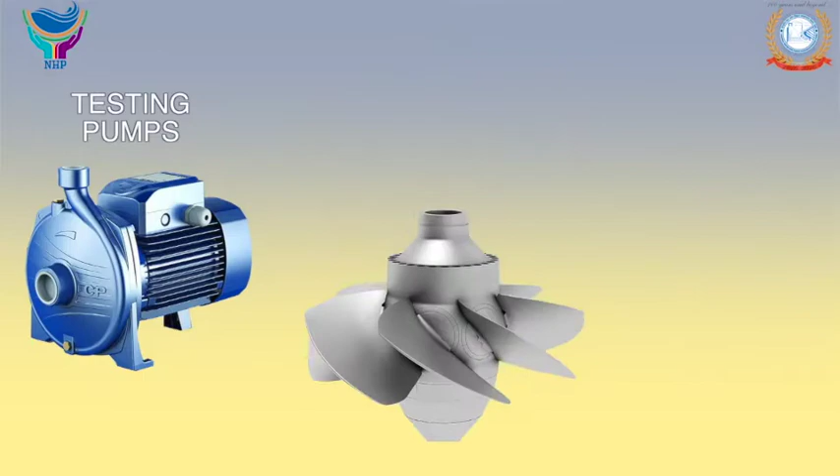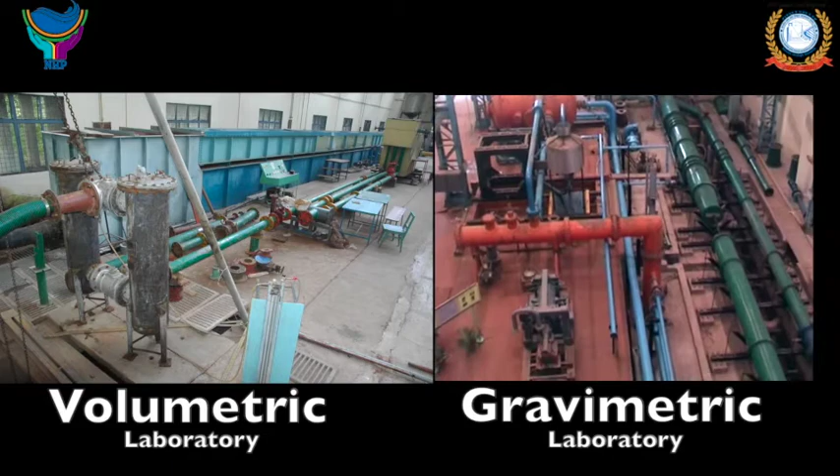The Hydraulic Machinery and Cavitation Division of CWPRS, established under UNDP during 1984, caters to the services of testing pumps, turbines, and calibration of flow meters. The gravimetric and volumetric laboratories undertake calibration of flow meters and testing of filters and other flow elements.

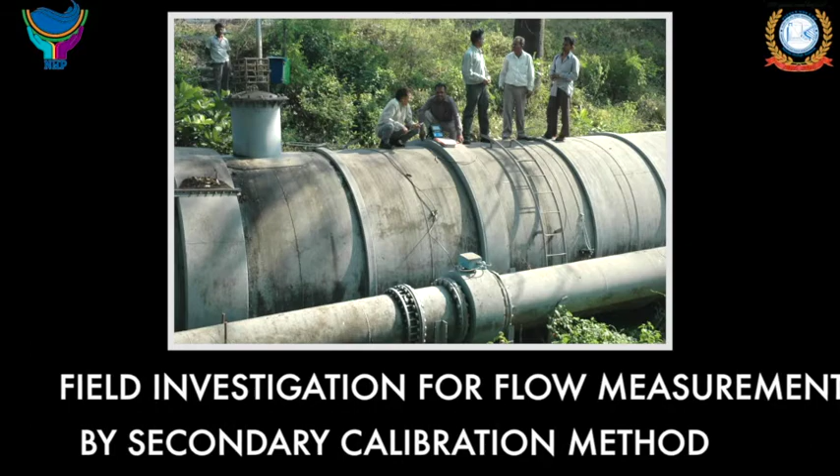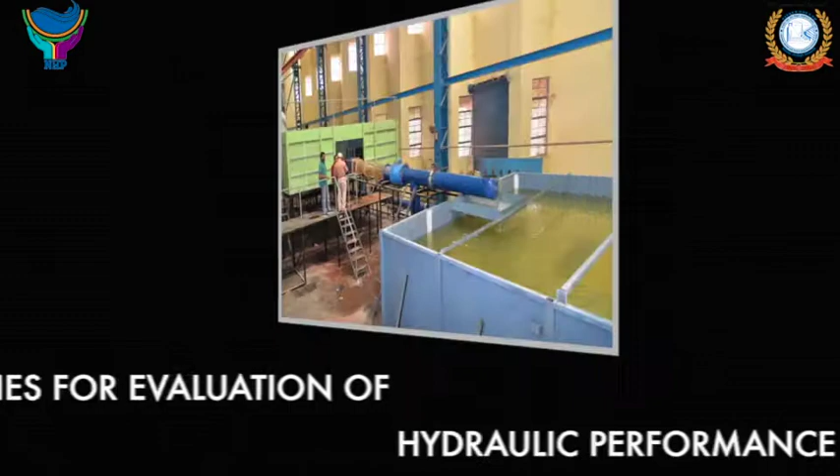Extensive experimental and research studies related to hydraulic machines and flow measurement in specialized areas undertaken in this division include field investigations for flow measurement by secondary calibration method, field studies to assess hydroturbine performance for hydropower plants, surge analysis of lift irrigation schemes, model studies for evaluation of hydraulic performance of pump intakes, and desk studies for development of hydraulic designs of pumping systems.

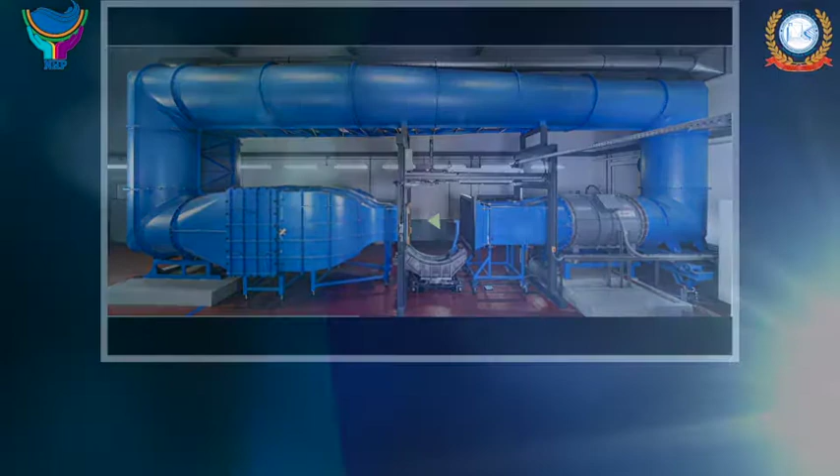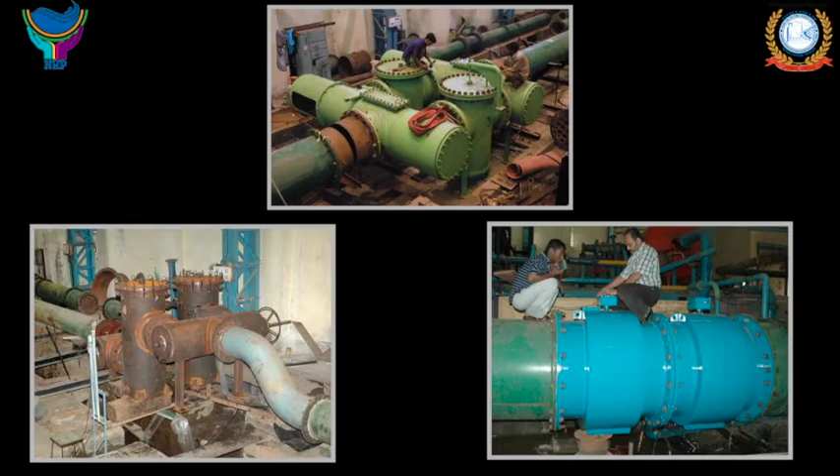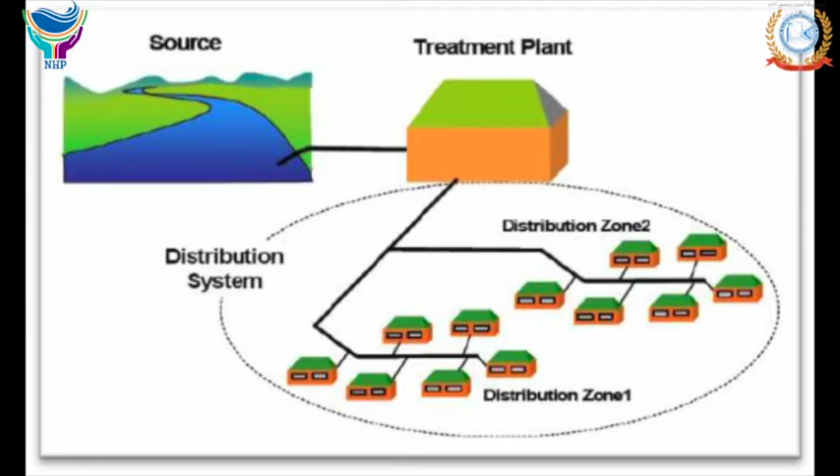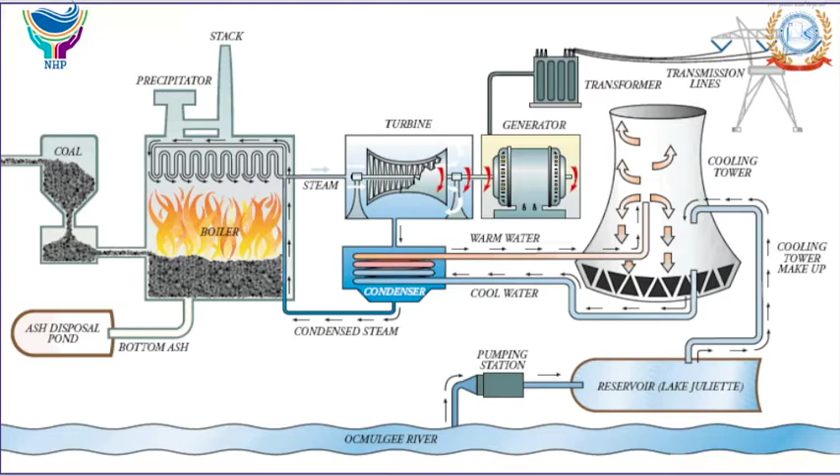Calibration laboratory services. Calibration of flow meters and water meters is essential for custody transfer of water, interstate sharing of water, and flow through hydroturbines in the hydropower sector, drinking water distribution systems, etc. Filters and strainers are used to filter out suspended particles in water to supply clean water for drinking water supply schemes and applications like steam generation in thermal power plants, and are required to be tested for the pressure drop which defines their effectiveness.

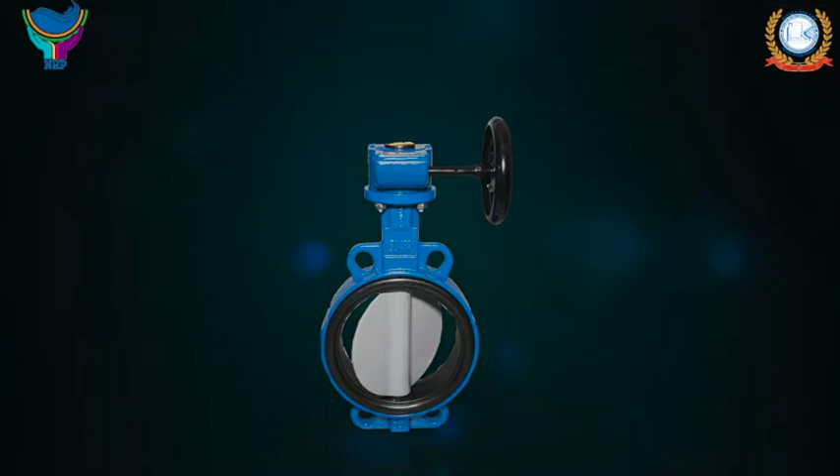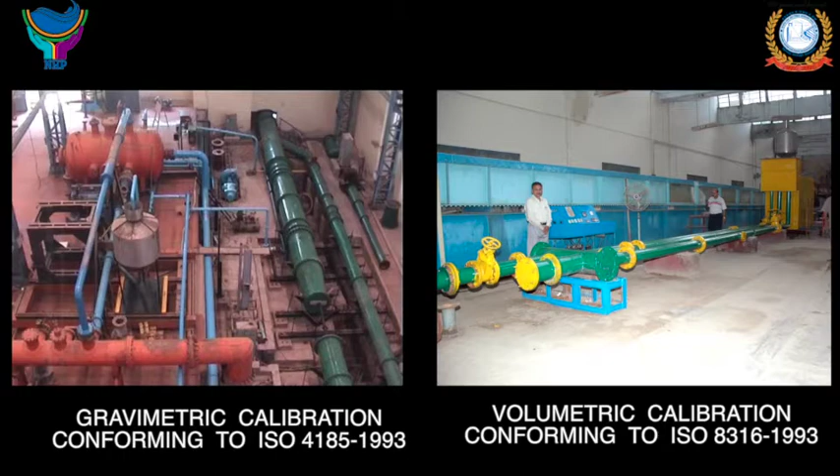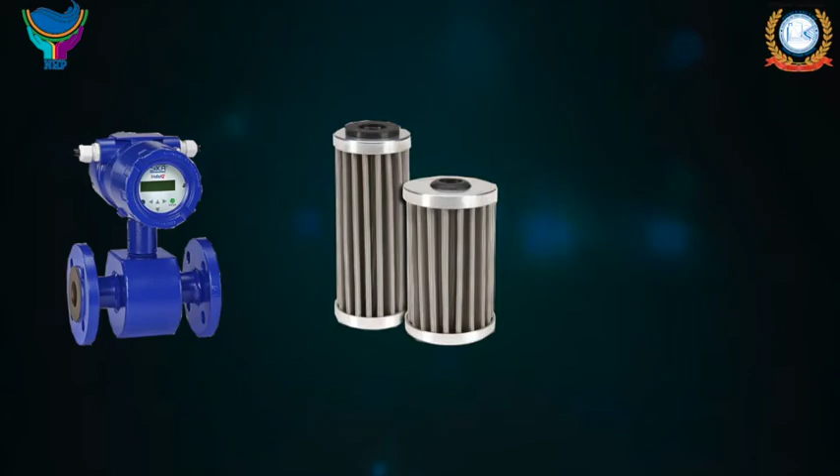Valves, usually used to control the flow rate in any flow process system, are required to be tested to ascertain their head loss and discharge characteristics. Gravimetric and volumetric calibration facilities conforming to ISO 4185-1993 and ISO 8316-1993 are available at CWPRS for calibration of flow meters, testing of filters, and ascertaining valve characteristics.

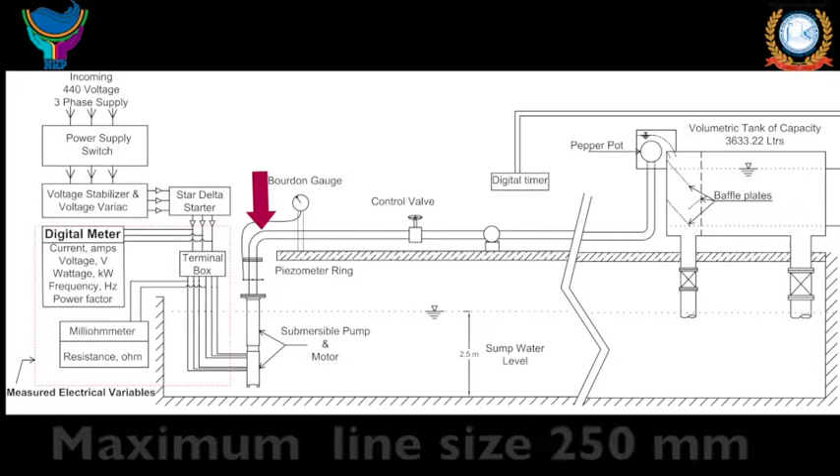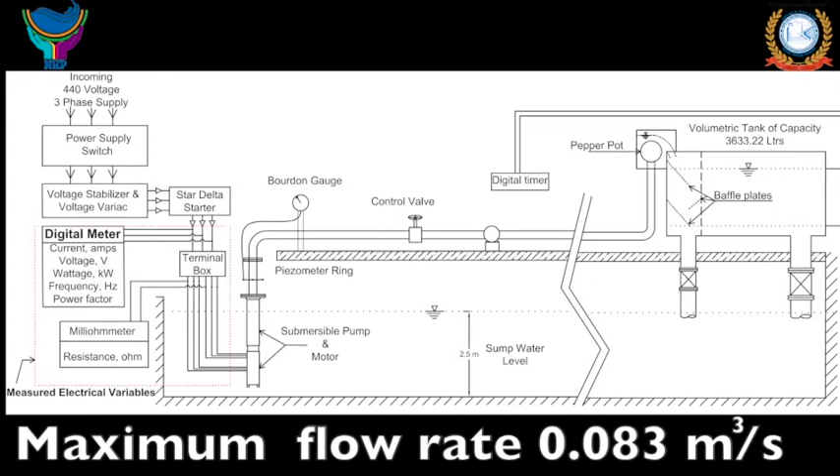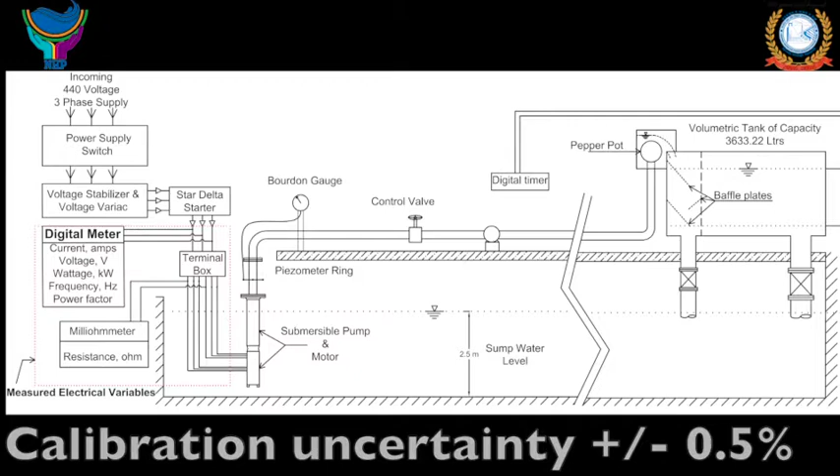Volumetric calibration facility: maximum line size 250 mm, integrated with submersible pump test rig. Maximum flow rate 0.083 cubic meters per second. Calibration uncertainty plus or minus 0.5%. Capacity of volumetric tank:

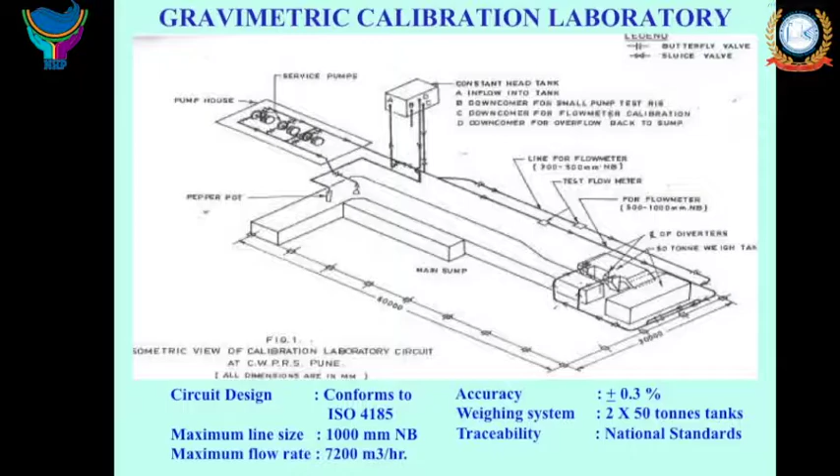3.633 cubic meters. Gravimetric calibration facility: maximum line size 1000 mm, extendable up to 1200 mm. Maximum flow rate 2.0 cubic meters per second. Calibration uncertainty plus or minus 0.3%. Weighing tank capacity 100 tons. This facility is so far the largest in the country.

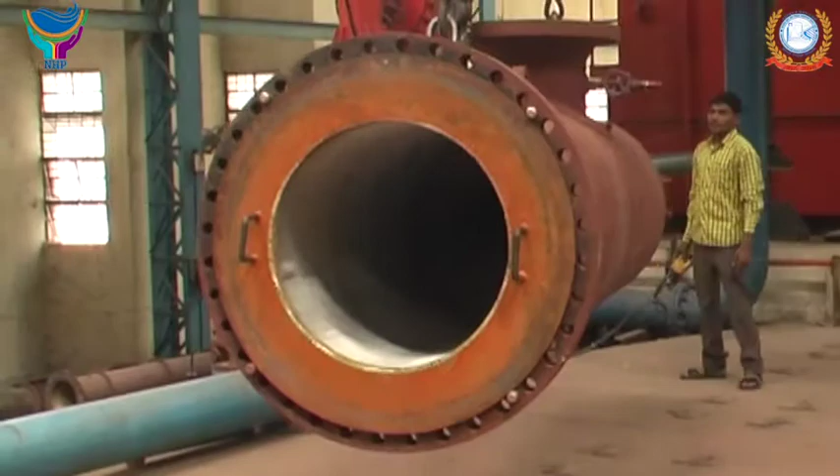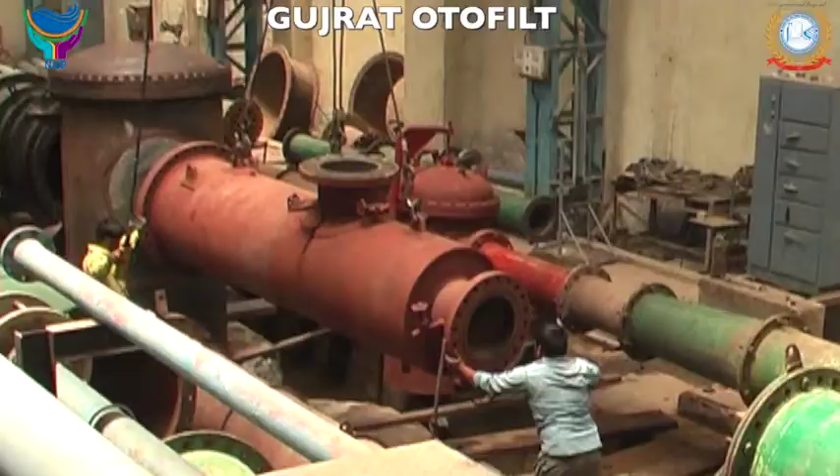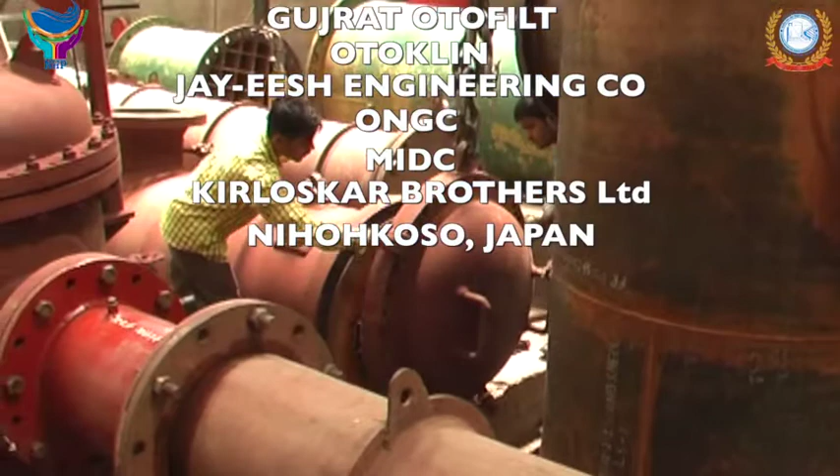Pressure drop test and design optimization of heavy-duty water filters of thermal power projects of NTPC, BHEL, L&T helped boost infrastructural capabilities of the nation for energy generation needs. Testing of filters and calibration of flow meters performed for clientele like Gujrat Otofilt, Otoklin, Jay-Eesh Engineering Company, ONGC, MIDC, Kirloskar Brothers Limited, Nihohkoso Japan, SBEM, Filtration Engineers, Shivalik Engineering, Nivo Controls, Manas Microsystems, and Aquamias Instruments.

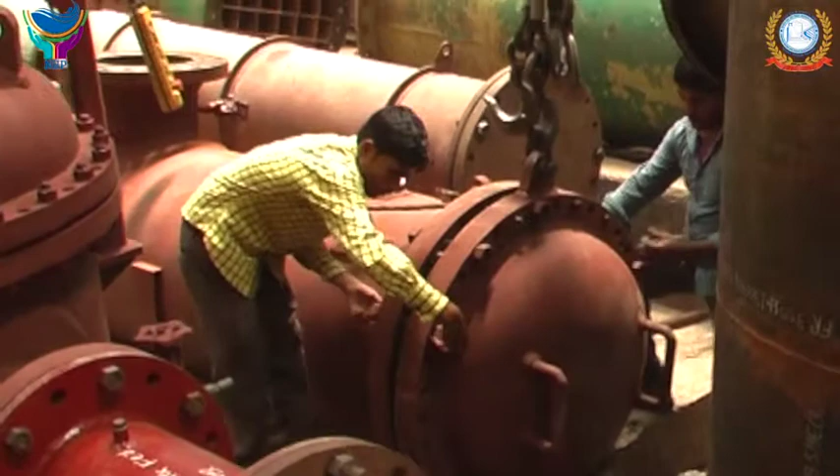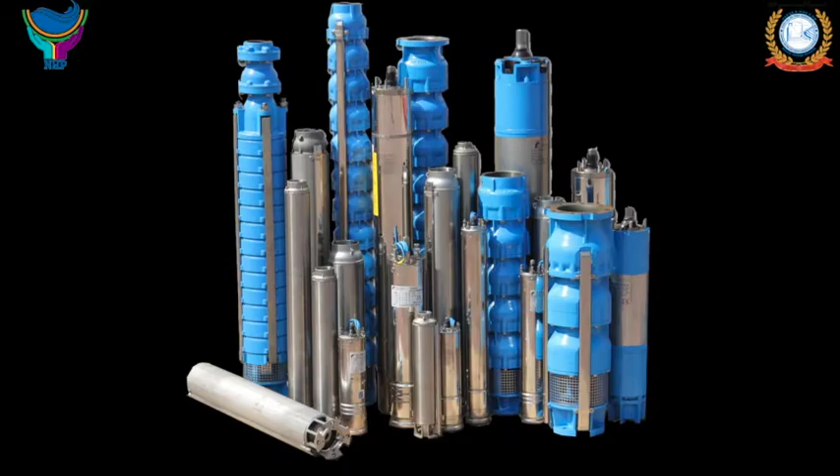Performance testing of submersible pumps. Effective utilization of groundwater is possible with performance evaluation of the submersible pumps. This hydraulic machine is one of the important disciplines concerned with studies of rotordynamic pumps and pumping systems.

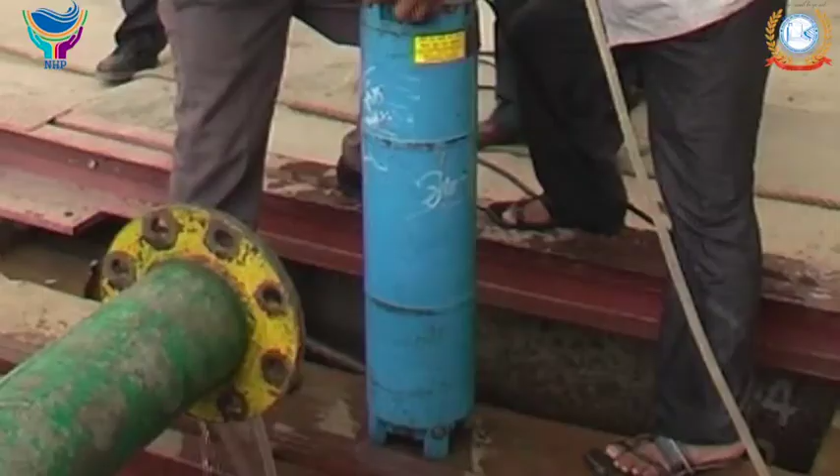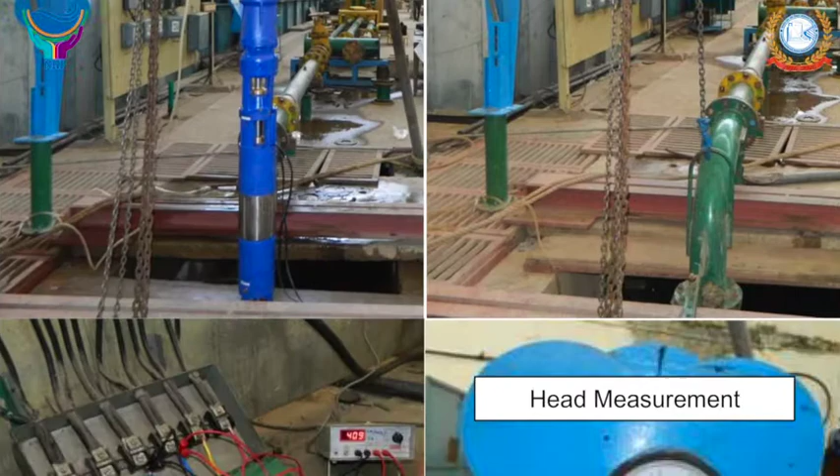Submersible pump sets are tested as per the testing procedure described in IS 9283-2013, 8034-2002, and also 9137-1978. During the last 30 years, CWPRS has provided practical solutions to various projects in the field of rotordynamic pumps.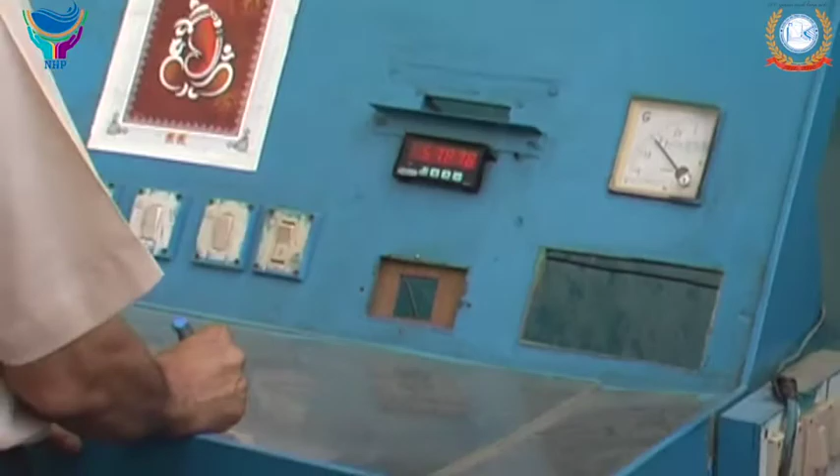The state governments of Rajasthan, Bihar, Karnataka, etc. had benefited from hydraulic performance and overload tests on submersible pump sets of different flow and head capacity. In recent times, pump sets of various capacities for the irrigation department of Uttar Pradesh, Lucknow, were extensively studied. It is a standard practice to get a sample pump set tested during bulk purchase for bore wells.

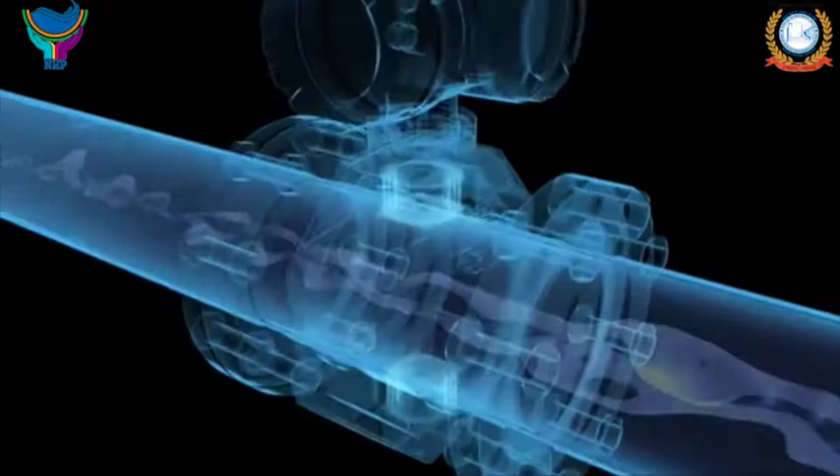Field investigations for flow measurement. The measurement of flow rate is very significant for effective utilization of available water resources. It is important to properly determine what type of metering technology is best suited for custody transfer or process control applications.

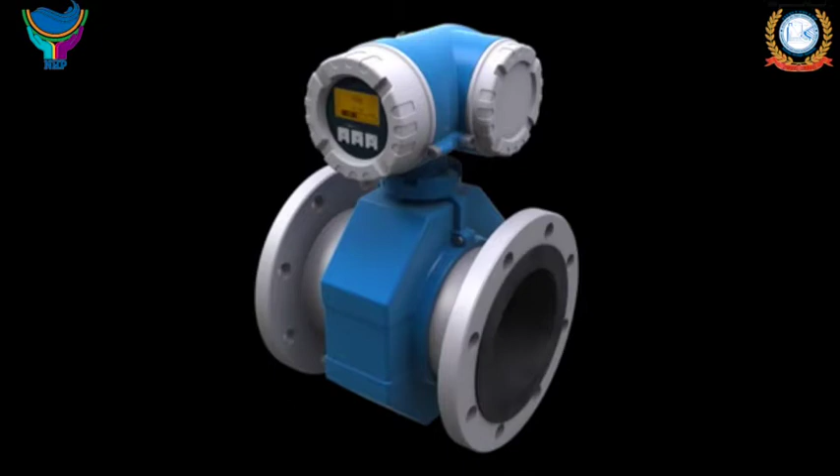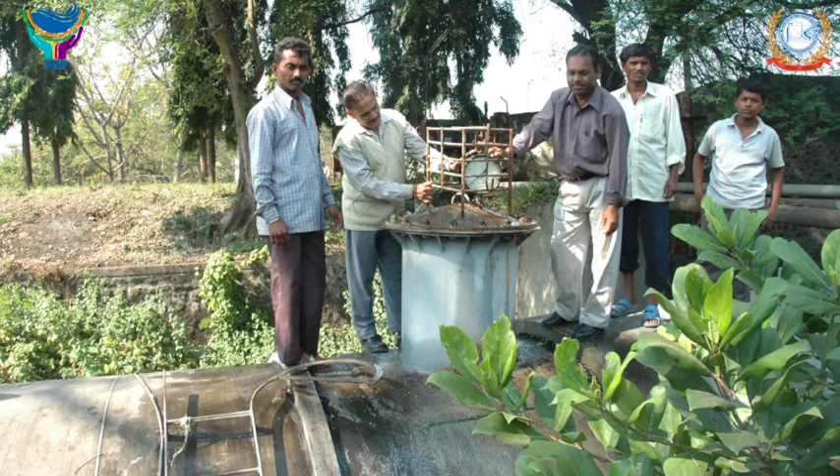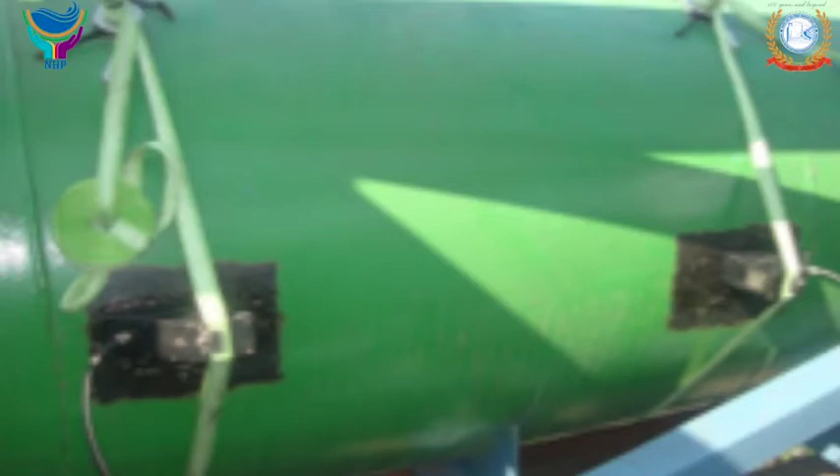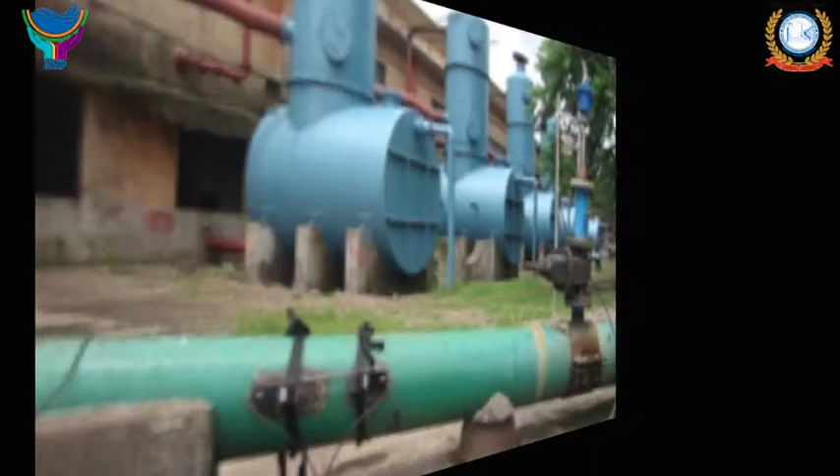Many industries are looking forward to streamline the water consumption pattern through water auditing in view of scarcity of water resources. Site calibrations of flow metering systems are performed by secondary calibration methods in order to suggest technical guidance for proper flow measuring installations at site and to improve the existing water drawal system for better usage of water. Hence, many agencies like Tata Power, NTPS Nashik, Usha Martin, and Hindalco are some of the beneficiaries of this exercise.

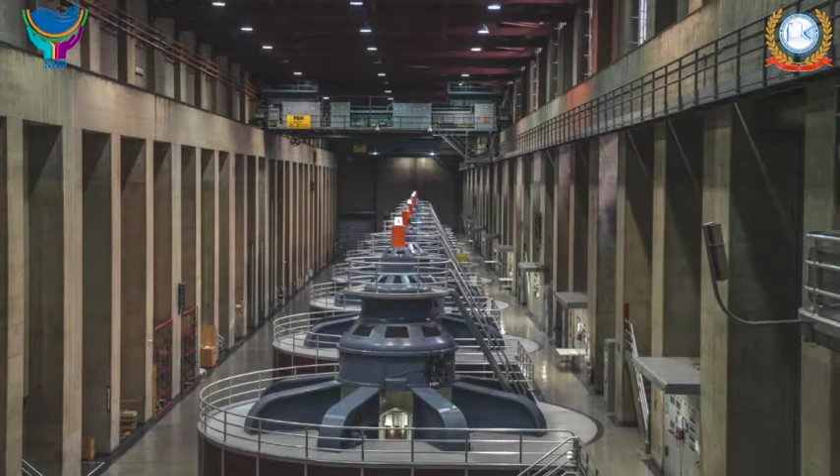Field studies for assessing hydroturbine efficiency for hydropower plants. Performance evaluation of hydraulic turbines undertaken through field studies comprises measurements of flow for different reservoir levels, net head on turbine, and power output.

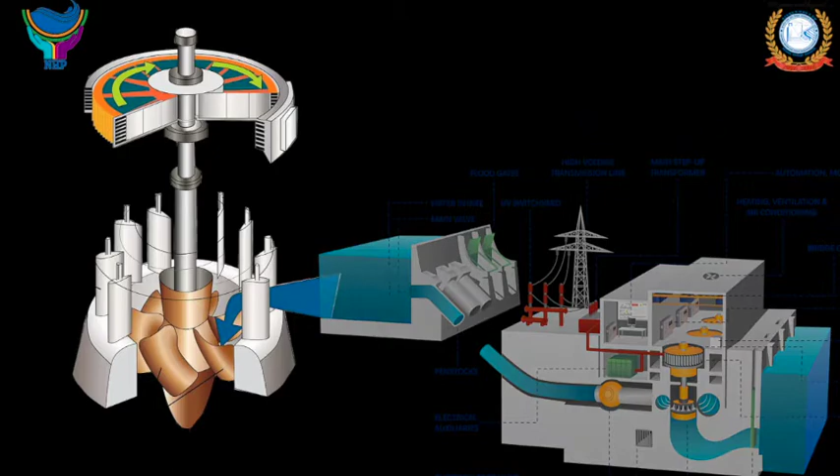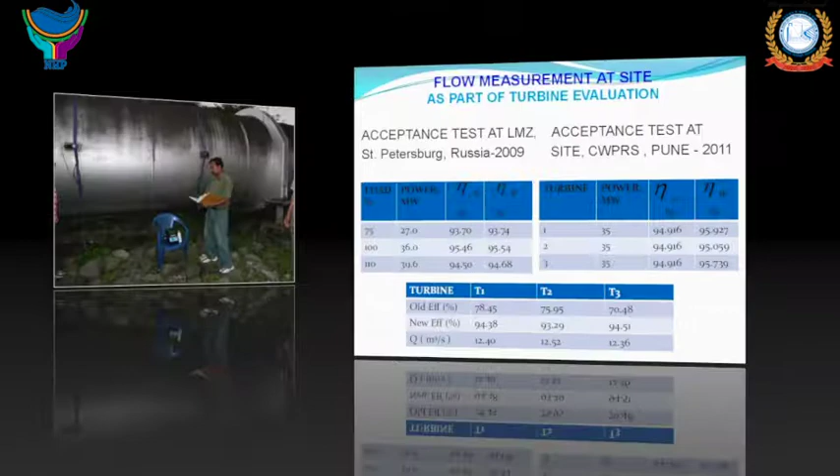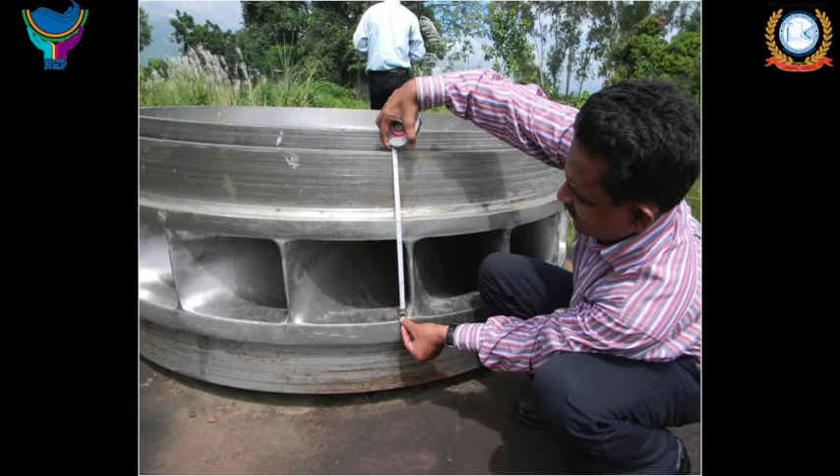Evaluation of overall efficiency of a turbine plant is an important factor during normal operation of an existing plant or renovation, modernization and upgradation works. Turbine efficiency plays a vital role during acceptance test of a new turbine unit.

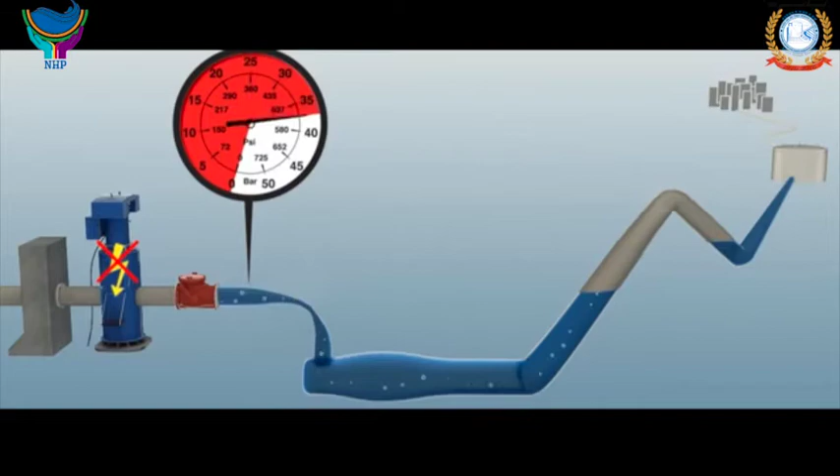Surge analysis. Water hammer occurs whenever the fluid velocity in pipe systems suddenly changes, such as at pump stop, pump startup, or valve opening and closure. It is important to design pumping systems to prevent water hammer in order to avoid potentially devastating consequences, such as damage to components and equipment and risks to personnel.

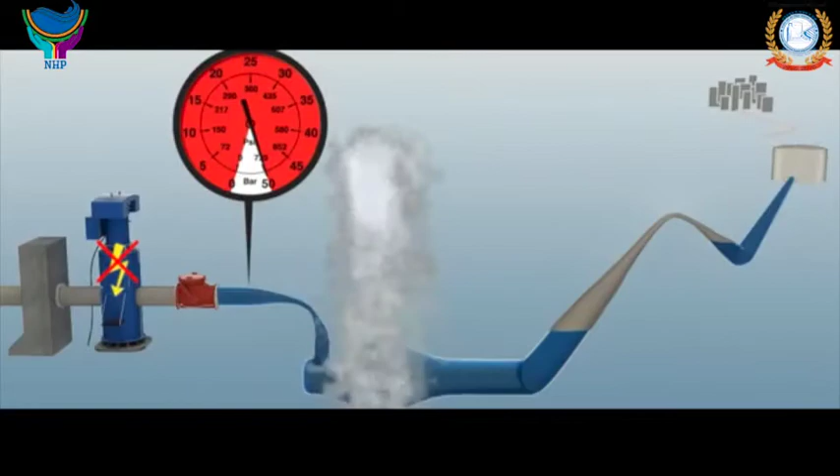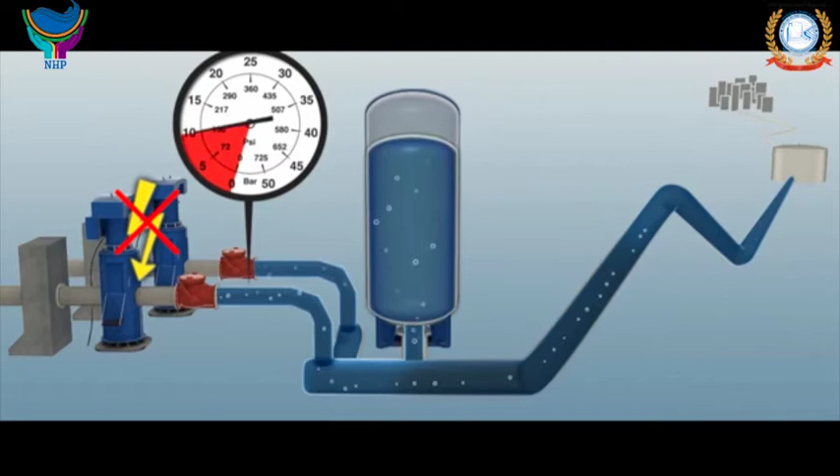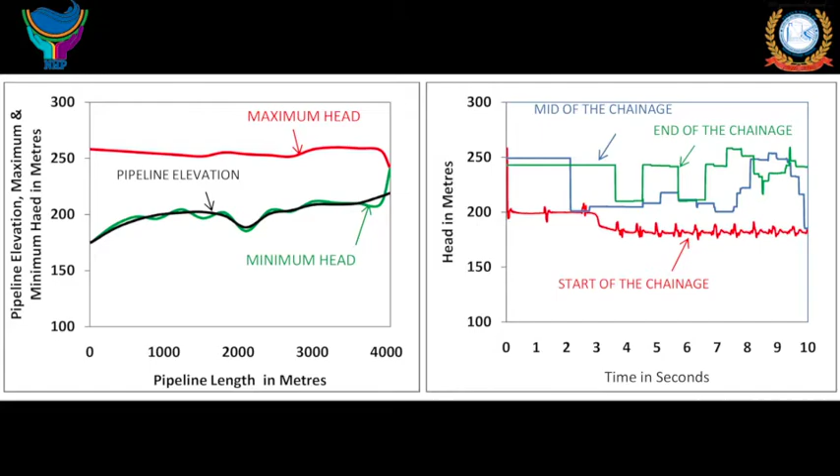CWPRS has a special purpose software, WH2.7, developed by Dr. Hanif Chaudhry, to offer solutions based on method of characteristics. Based on transient studies, anti-surge devices such as air chamber, air valve, zero velocity valve, etc. are recommended to mitigate water hammer for safe operation in the long run. Many NTPC projects, state government agencies and other public health engineering departments are beneficiaries of this work.

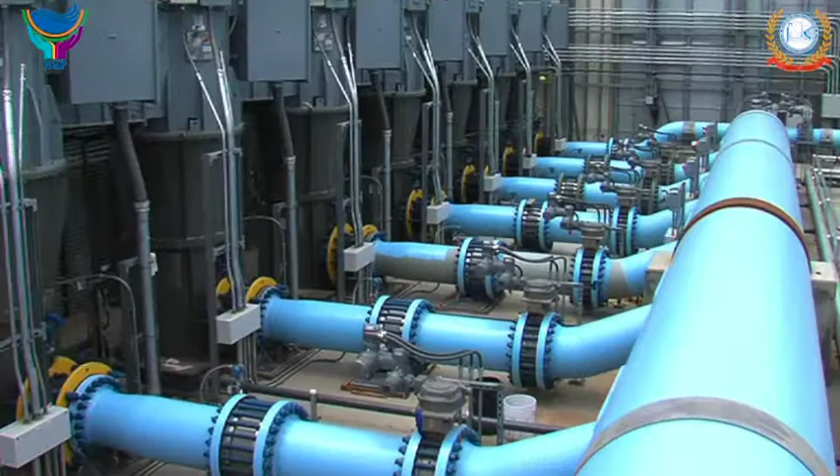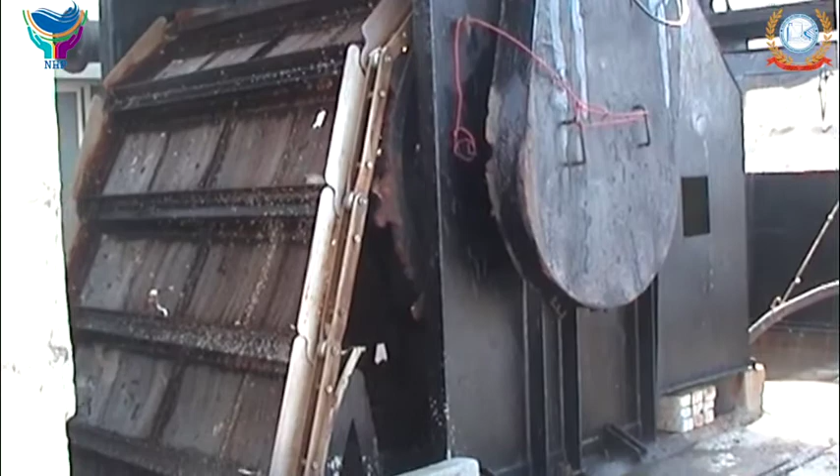Hydraulic model studies for pump intake systems. Most of the cooling water intakes in thermal power stations, drinking water systems, irrigation schemes, etc. involve multiple intakes fitted to a sump that caters water for specific purposes. In order to obtain satisfactory performance of pump intake systems, physical model studies are conducted.

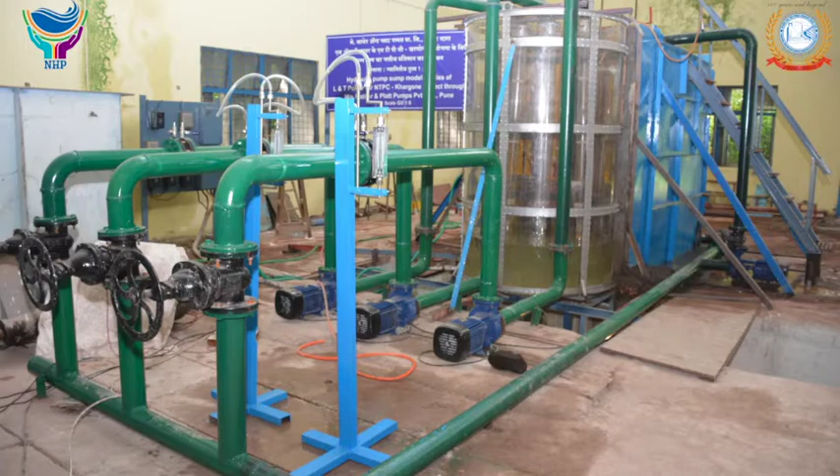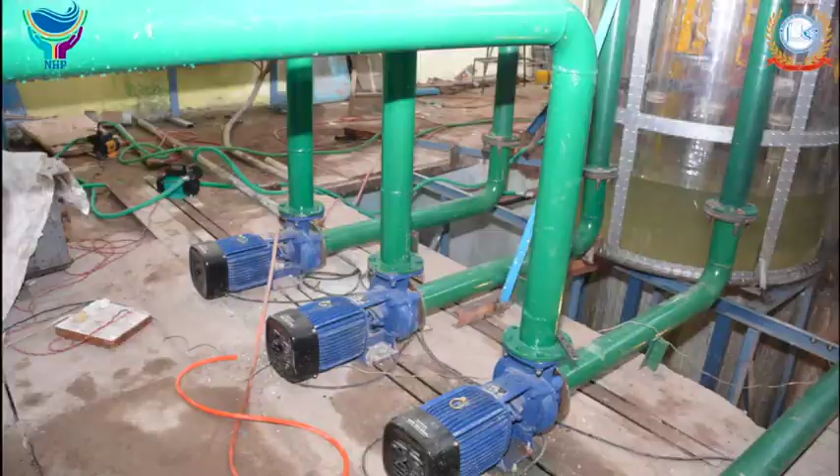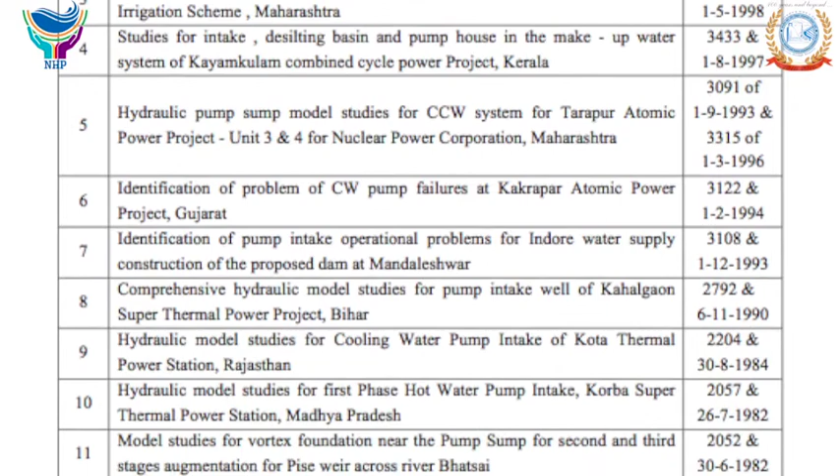A number of studies of pump-sump design have been undertaken at CWPRS. These include Bhopal City Drinking Water Supply Scheme, Nathpa Jhakri, Tarapur and Madras Atomic Power Station, and various super thermal projects like Kota, Parali, Singrauli, Tuticorin, Talcher, Unchahar, Farakka, Ramagundam, Kathalguri and Tripoli West Thermal Power Station in Libya, Port Klang Thermal Power Station in Malaysia, and Kuttiyadi Power Intake Studies to evolve vortex swirl-free flow conditions and safe, economical designs of pump intakes.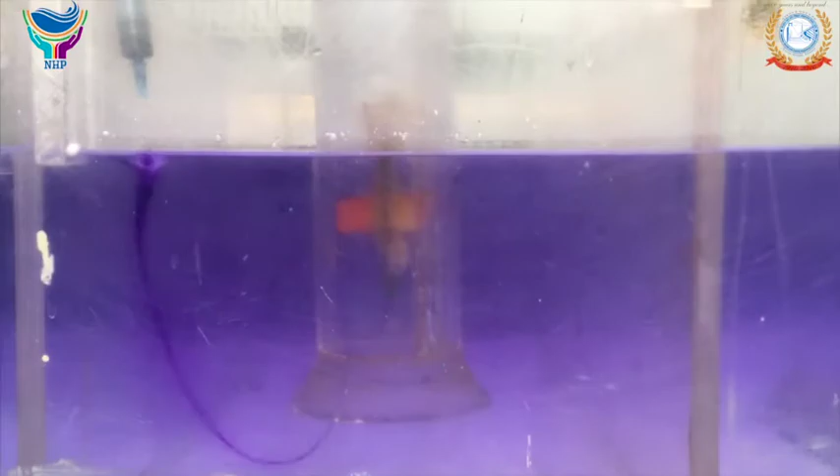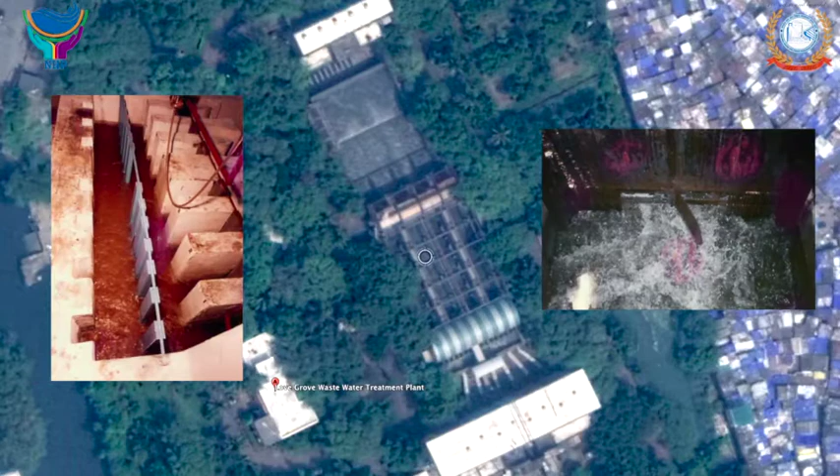The model study for Love Grove Sewage Pumping Station at Worli, Mumbai was a special study, considering the limited space at the site. Vertical expansion of the sewage filtering was recommended, which suited a city like Mumbai.

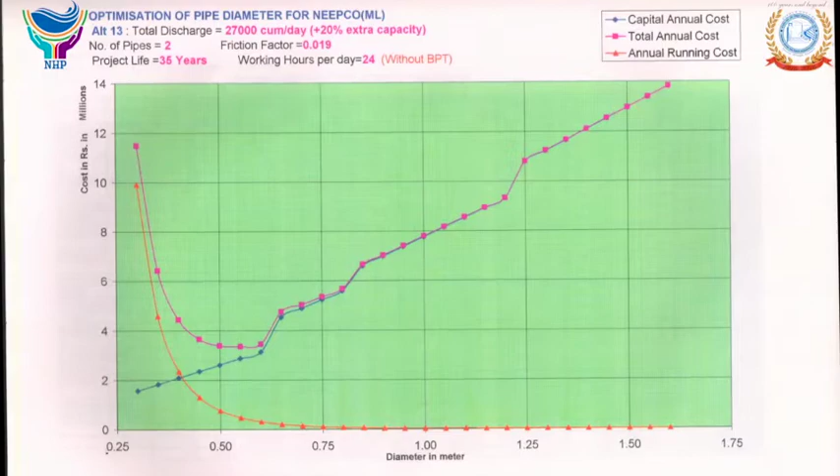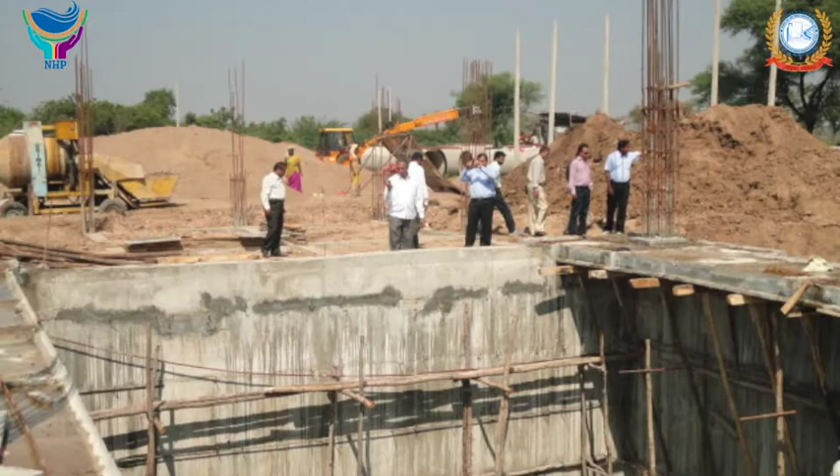Desk studies for economic pump-sump pipeline optimization were also carried out for Damodar Valley Corporation, NEEPCO, Gomti River, Indore, and Bhopal City Drinking Water Supply Scheme, and Bonal Lift Irrigation Scheme for KBJNL, Narayanpur in Karnataka State.

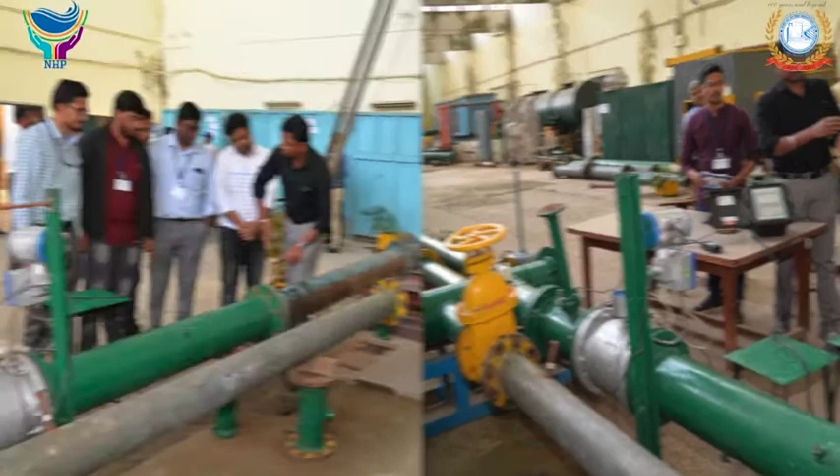Under the HMC division, CWPRS has been conducting various training courses and national workshops related to flow measurement, pipeline optimization, transient analysis, pumping systems and operation of turbine plants.

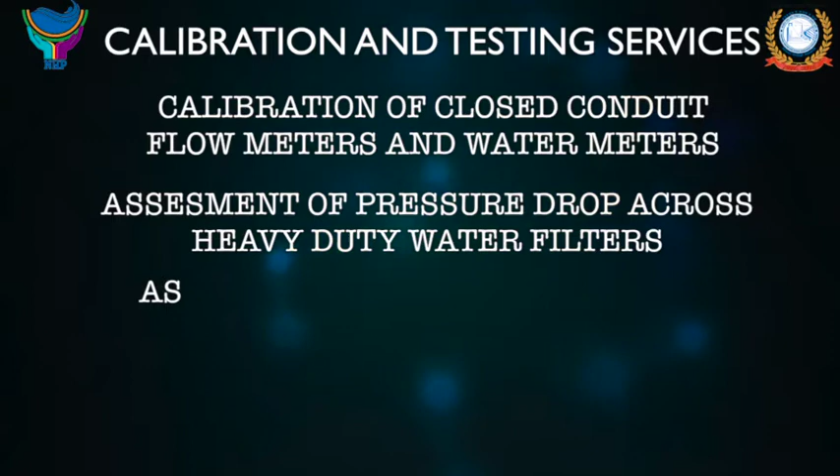Services at HMC division: calibration and testing services, calibration of closed conduit flow meters and water meters, assessment of pressure drop across heavy-duty water filters, assessment of flow coefficient of hydraulic valves, and hydraulic performance testing of submersible pumps.

Field studies: performance evaluation of hydroelectric power plants, upgrading of existing hydro power plants, site performance of flow meters and proper layout for water pumping system, standard installation of appropriate flow measuring devices, pumping system optimization, surge analysis of lift irrigation schemes, and pump-sump model studies for improvement.